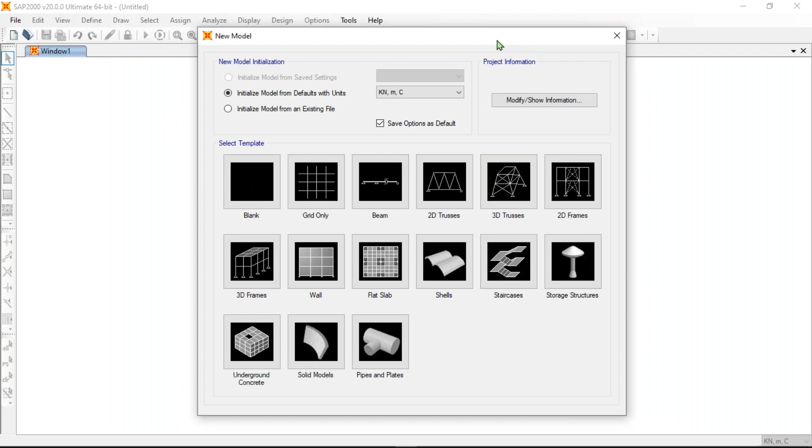Now I'm just showing you how to set up a file. Click on New Model, and then you will be displayed with a dialog box asking you to set the units of the model. Basically the units will be kilonewton and meter, and then you will be displayed with different types of templates. I'll be explaining all these templates now.

The first template is your blank template. Whenever you select this template, when you open the SAP file, the template will be blank and there won't be any grid lines. This template is used whenever you are importing any AutoCAD file or any files from other software.

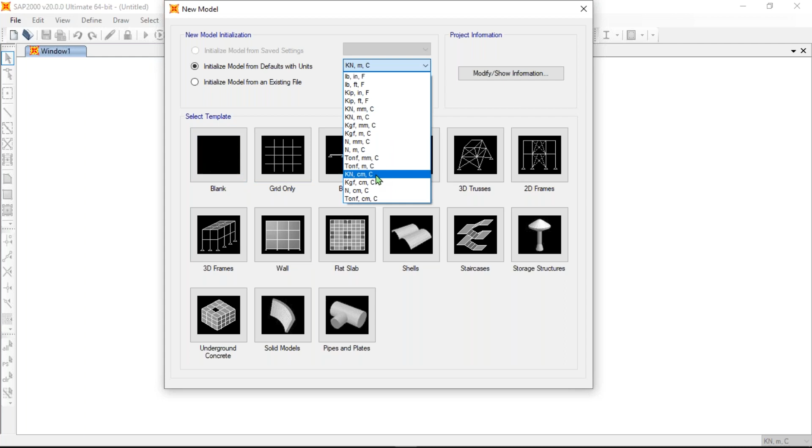First of all, this one is your units. You have to set the units, and then you have to select the template which you want to work in. The first one is the blank template. It is used to import other file formats to SAP 2000 and start working on them. It can be used to import AutoCAD centerline diagrams and start drawing from them.

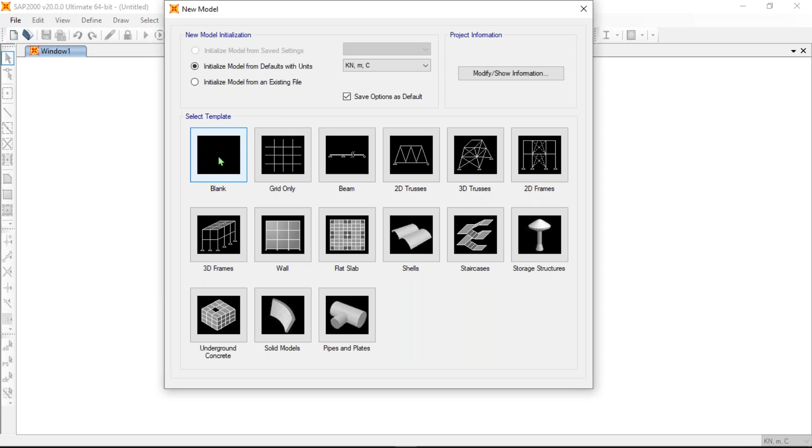The next one is the grid only template. With this template, you can set the center line diagrams, specify the distance between the grids, and start drawing from the grid. There are grids in X direction, Y direction, and stories. You can specify the length and the number of grids you require, and start your modeling from this grid only. The next one is your beam.

If you want to analyze a beam, you can use this beam template, and then you have 2D truss and 3D truss. The main difference between trusses and frames is that trusses only have axial forces, only tension and compression in the member. They won't experience any bending moments or shear. In order to draw and analyze a 2D truss, you can use this 2D truss template.

The 3D truss is used to draw high tension towers, high voltage lines, and telephone towers. You can also use it to draw industrial sheds or the function halls we see in our daily life, and different types of industrial and commercial buildings with steel structures. You can also do them in the 3D frames.

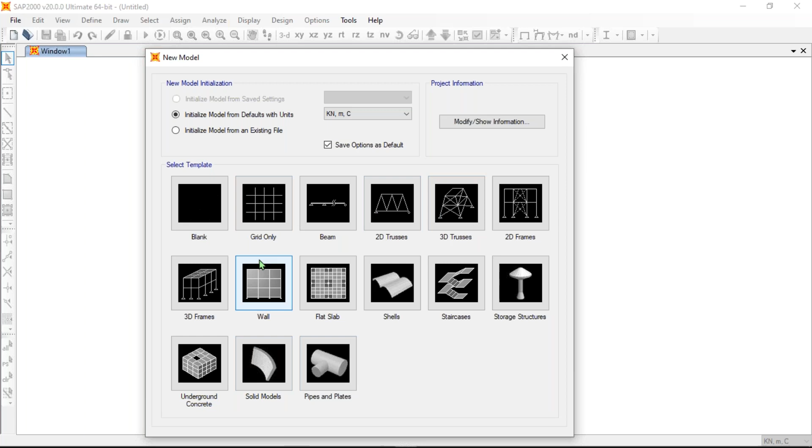Okay, these are the different templates available in SAP 2000. Unlike ETABS or any other software, SAP 2000 provides different types of templates, so a vast range of structural elements or structural models can be analyzed using these templates.

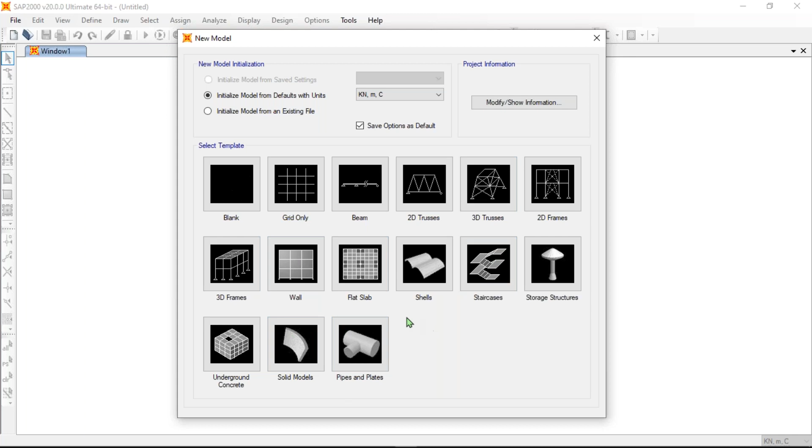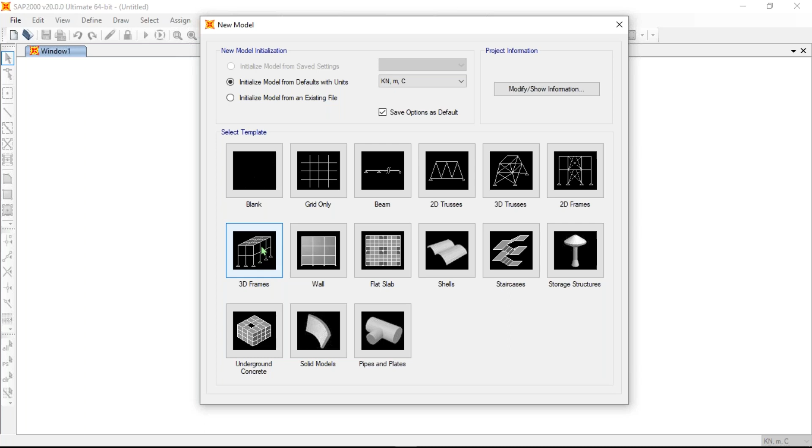In this FDP, the main objective is analyzing residential and commercial buildings. For that, we will be using only the 3D frames template. After clicking on new model and setting the units, click on this 3D frames template.

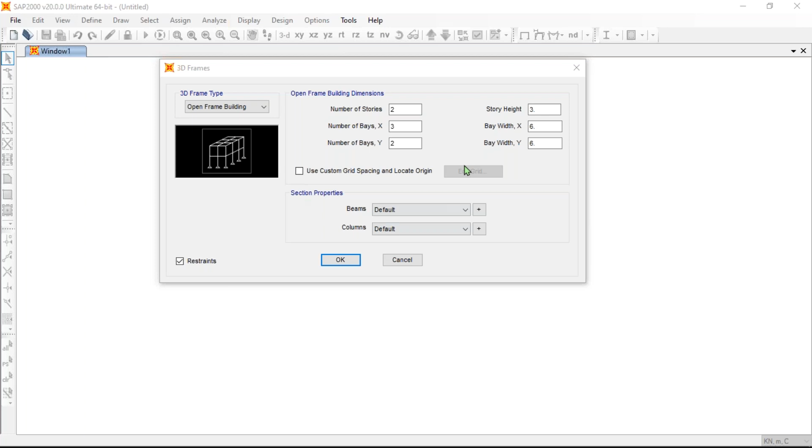Okay, in this 3D frame... yes sir. Yeah, a small clarification. This video is recording on your screen, right? It's in recording mode already? Yes sir, it is recording. Okay, then fine. Sir, do I need to save the recording at the end, or will you be doing it? No need, I'm recording. It will record automatically. That's it. Okay. Yes, sir. Okay, let's continue with our FDP session.

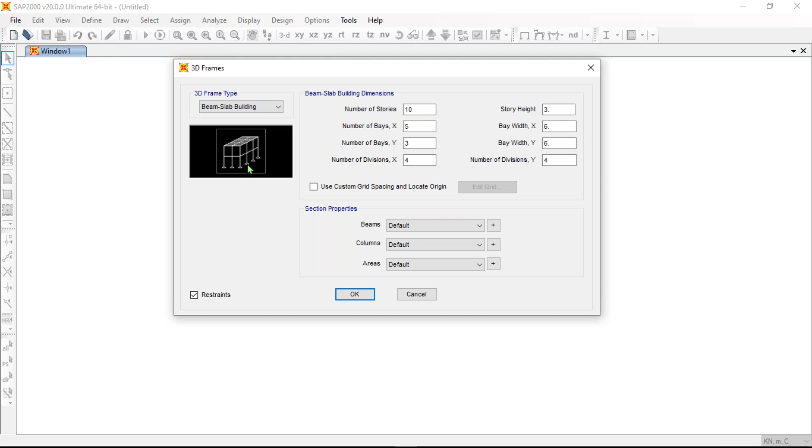In the 3D frames, you will be shown 4 options. One is open frame building, an open frame without any slabs. The next one is perimeter frame building: only the perimeter frames will be available, and the internal beams and columns disappear. Beam slab building comprises columns at the perimeter and interior, beams, and slabs. And the last one, flat plate building, only the plates and columns will be displayed.

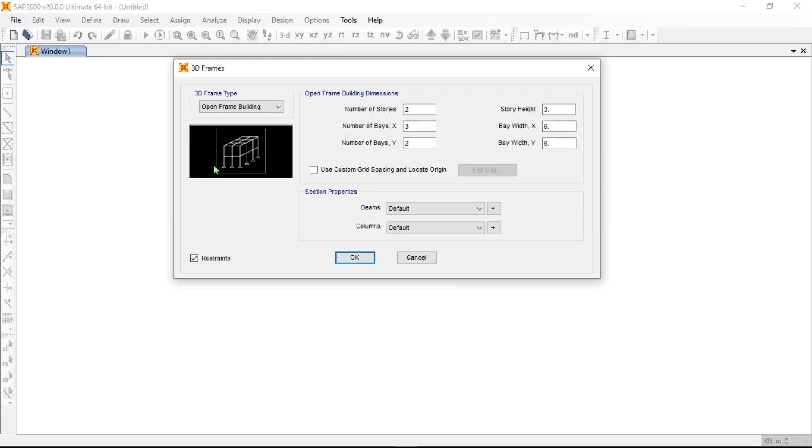To start our modeling, I'll be going with beam slab building. You can also use the open frame building; after creating the model, you can draw the slabs. Generally, I go with the beam slab building, as the slabs are created by default. These are the 4 different types of 3D frames.

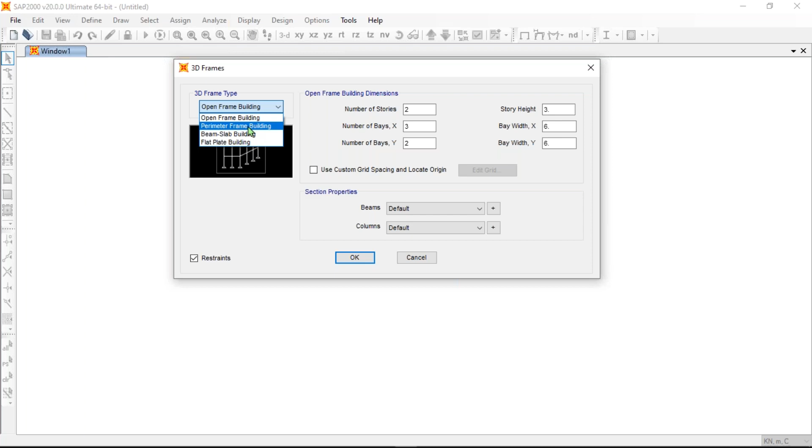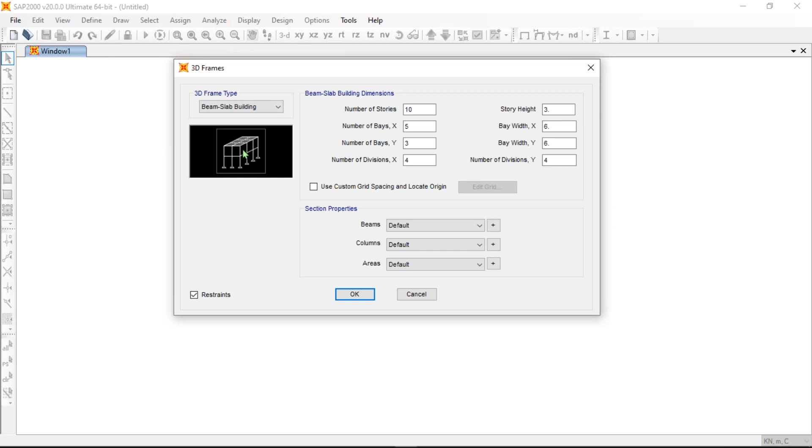The first one, open frame building, consists only of columns and beams. The next is perimeter frame building. The difference is that in the open frame building you have columns in the internal parts also, while in the perimeter frame building only columns and beams along the perimeter are created by default. In the beam slab building you also have slabs along with columns and beams. And in the flat plate building, you only have plates and columns.

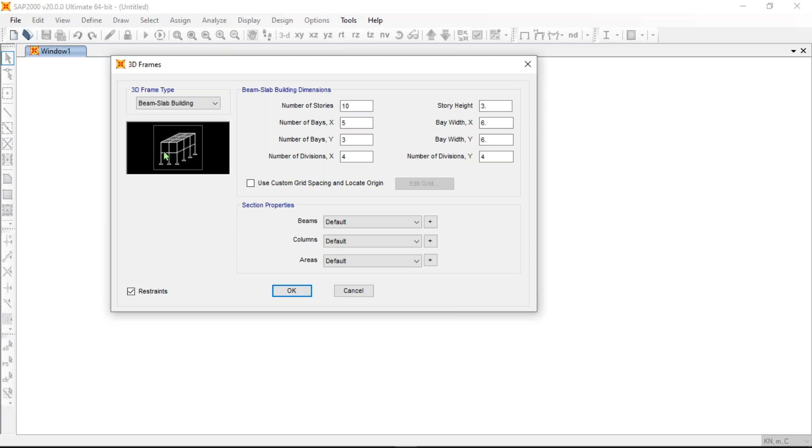Now I'm going to beam slab building. After creating this, you will be asked to give the number of stories, number of bays in X direction, number of bays in Y direction. A bay is nothing but the empty space between 2 columns. The space between 2 columns is called as bay.

If you give 5 bays, 6 columns will be created. Like if you give n number of bays, n plus 1 number of columns in that direction will be created. Now I'm just giving 3 bays in the X direction, and I'm giving 3 bays in the Y direction. Okay, and then you'll be having this bay width.

The first one is the number of stories. I'm just changing this. Story height is the vertical distance. The story height is the vertical distance, and the number of stories is how many replications of the stories you want. Now I'm just changing this to like a 5-story structure, with the number of bays in x direction 3,

and number of bays in y direction 3, and then the bay width in the x direction. Bay width is nothing but the distance between one column to the other column. So let us assume the bay width as 3.5 meters, and the bay width in the y direction, let us assume 4.5 meters.

And these divisions are nothing but how many divisions the bay is divided into. These are the divisions. Just put this to default. All these values are used whenever you are doing any geometrically symmetrical structure. When you enter these values, the grid or the center line will be created in a geometrically symmetrical way, which is uniform in each direction, with uniform spacings.

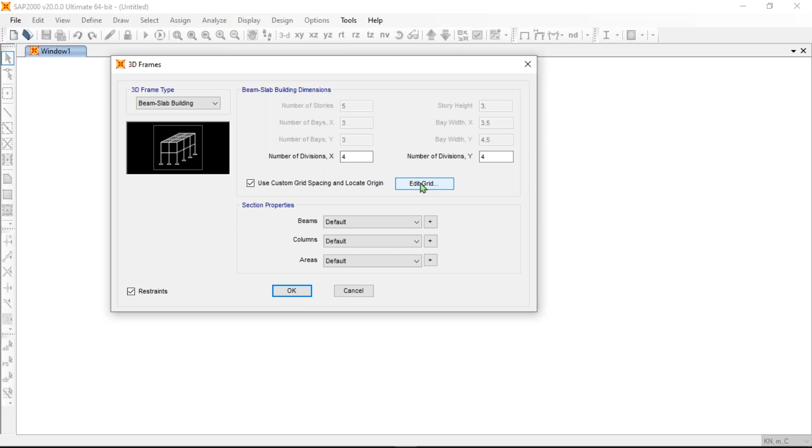If you want to create a frame with uneven spacing, you have to use this option called use custom grid spacing and locate origin. You have to tick this option, and these will be turned off, and you will be having the edit grid option. I'll be explaining the slabs when we start modeling.

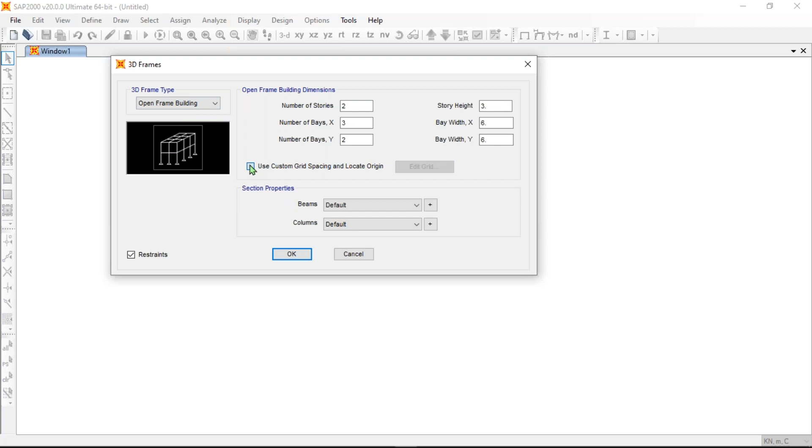I'm just moving this to open frame building. These are the same options. Just click on this edit grid, and you will be displayed with the define grid system data dialog box. In this, you will be having the different ordinates. This is the center line diagram. If you are familiar with center line diagrams and plotting, you will understand this one. I'll be explaining this once again.

The first one is x grid line data. In the x grid line, there are 4 grid lines: first grid line, second, third, and the fourth one. The axis will be somewhere in the center, and these are represented with the help of the ordinates from the axis. Like in the x, it is -9.

The A grid line is at -9 meters distance, the B grid line is at -3 units, the C grid line is at +3 units from the axis, and the D grid line is at the distance of 9 units from the axis. These grid lines are placed with reference to the ordinates.

Now, if you want to just give the spacing between 2 columns or 2 grid lines, you can change this from ordinates to spacing. Previously it was ordinates, and now it is spacing. In the ordinates, the value of the x ordinate is given over here. Now, if you change to spacing, the spacing between A and B is 6 meters.

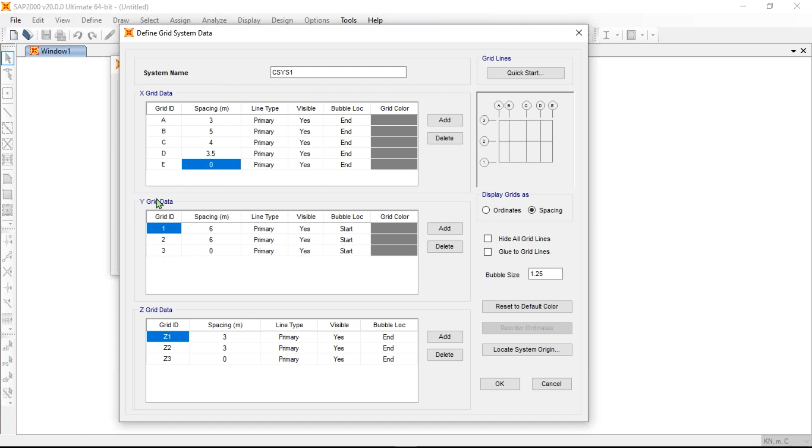And the next one, the same process in the Y direction. Now I'm just adding one more grid line in the Y direction, and for each one I need a uniform spacing of 4 meters. So I'm changing this to 4, and again I'm changing this to 4. Okay, so these are the uniform spacings in the Y direction. The last one is left to 0, as there is no grid line after 4.

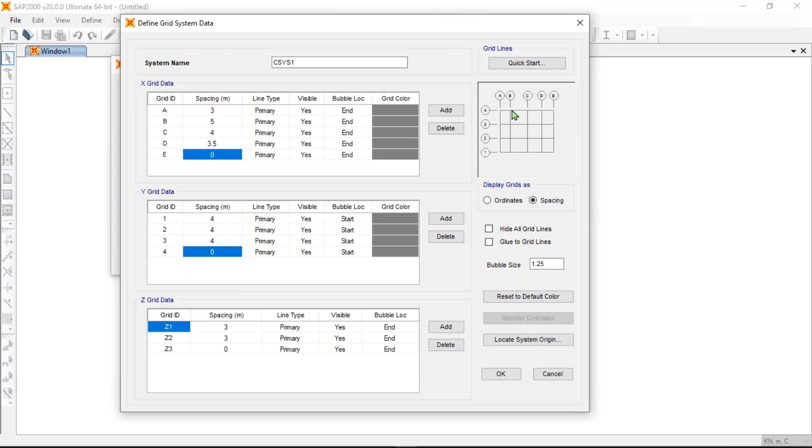And the next one, at the bottom, you will be displayed with the Z grid data. This is nothing but your story data. This one is in the X and Y direction, and this one is the story data. If you want to add another story, click on the add option and give it a name as Z4, or anything which you prefer. Just change the previous one to the story height.

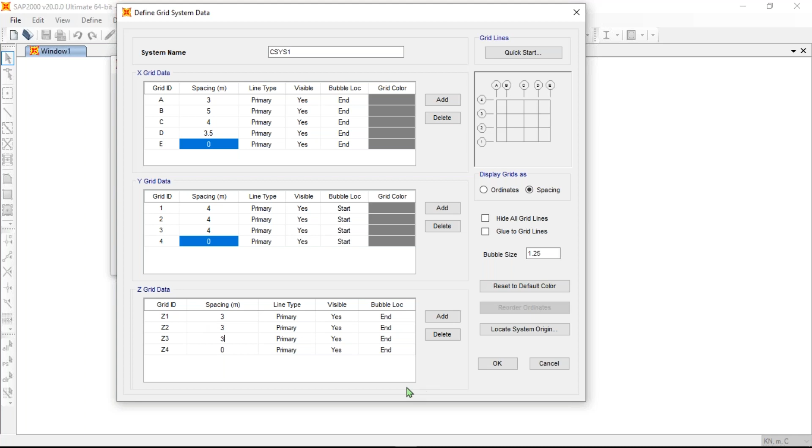Okay, first what you have to do is in this 3D frames template, select the open frame building, use custom grid spacing data, and then click on the edit. You will be displayed with define grid system data. In this grid system data, you can provide n number of grids just by clicking on this add. These grids are nothing but the lines where you place the columns, or whenever you're modeling, you will be modeling on the basis of the intersecting points of these grids.

This one is the A grid. These are the X direction grids. This one is the spacing of the grids. In order to create a new one, click on the add and give the spacing, and the last one should be left to 0.

That is when you provide this as spacing. If you click on the ordinate, you have to provide the ordinates with respect to the origin. The origin will be somewhere over here in the middle of the model. You have to create them with respect to the origin in the X direction and in the Y direction. I prefer to use spacing as it is more convenient.

I prefer to use this spacing. So you have to give the spacing between the grids. You have to give the bay spacing. And the next one, in the Y direction, you repeat the same. I am giving this as uniform spacing.

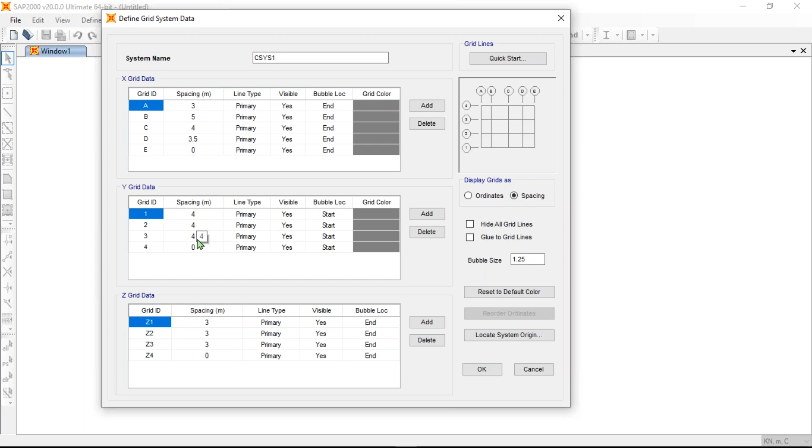And the next one is our Z grid data. Z grid data is nothing but your story heights. I have given 4 stories, each of which will be 3 meters in height. And after that, just click on OK, and the grid data will be saved.

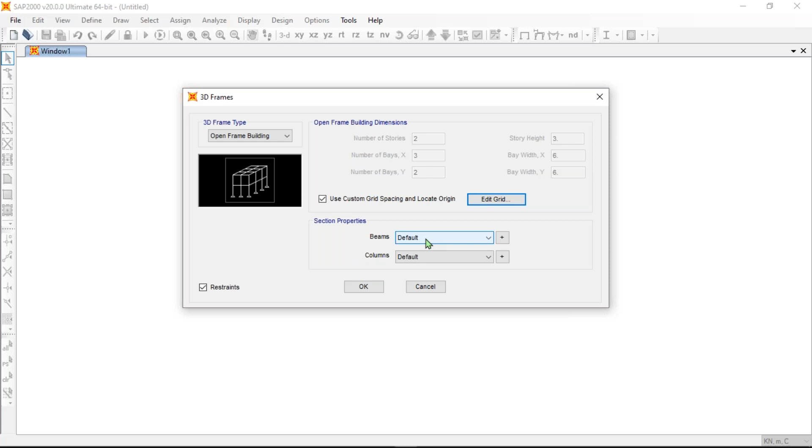And in this, you can provide default beams. By default, there will be some beams. You can provide them over here, or you can also model them after opening your model. Now we are just setting up the template, guys. Remember, we are just setting up the template. In the edit grid data, edit everything. Give the grid data and the story data and click OK.

And after that, you can give the section properties over here, or you can also do them after opening the project. Now I'm just opening the project, and this one is a restraint option. Restraints are nothing but the support conditions. Whenever you model a structure, there should be support conditions.

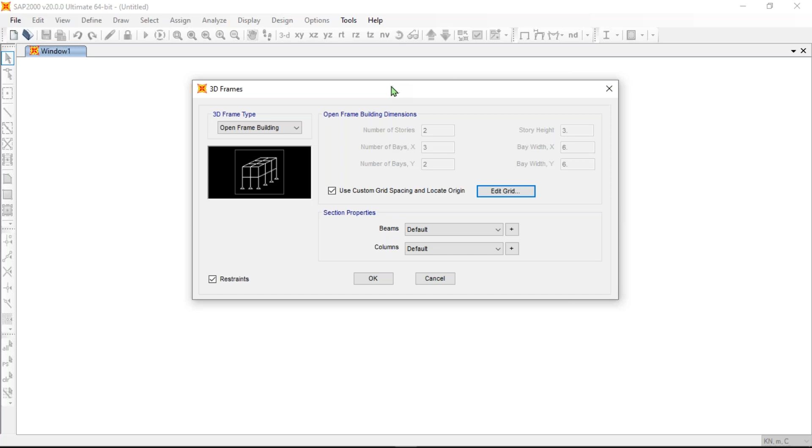Universally, all the support conditions for an existing building are fixed supports, like the foundations are fixed supports, except whenever we are using base isolators for research purposes, or at some buildings we will be providing base isolators. Not much in India. For that, the restraints will be changed. For all the other buildings, all the foundations are fixed supports. These support conditions are called restraints in SAP 2000 or any of the modeling software.

Just click on OK, and the model will be generated with the values which you have given previously. And this is the start screen of your SAP 2000. I'll be explaining the user interface now.

The top one is the title bar, and after that this is your main menu. These are the tool menu. These are all the different shortcuts which are placed across your working space. You can rearrange these shortcuts just by placing the mouse over here and dragging them. These are the different tools which we use for modeling and analysis purposes.

Now let us go through each of the menu options. The first one is the file. As you know, in the file you'll have options for creating a new model, opening an existing model, save as, importing and exporting from other software, or accessing the files which you have recently opened. This one is the file option.

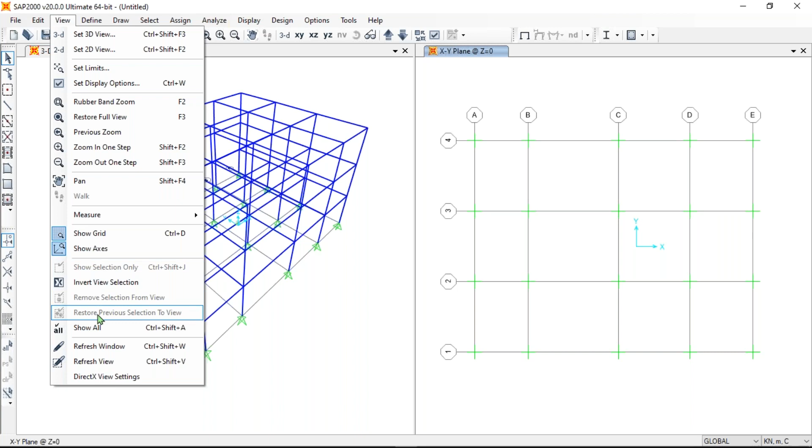And then you will have the define menu. From here, our structural part, the modeling part, or the academics which we have learned will be useful. The first one is the material. As we have discussed previously, from strength of materials we get all the properties of a material, such as its Young's modulus, its density, and other material properties. You can set up the material properties over here. We'll be explaining this in the next classes also. I'm just briefing you now.

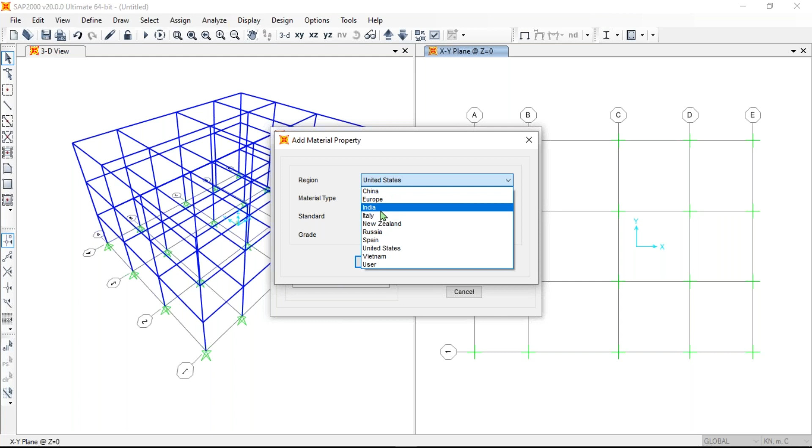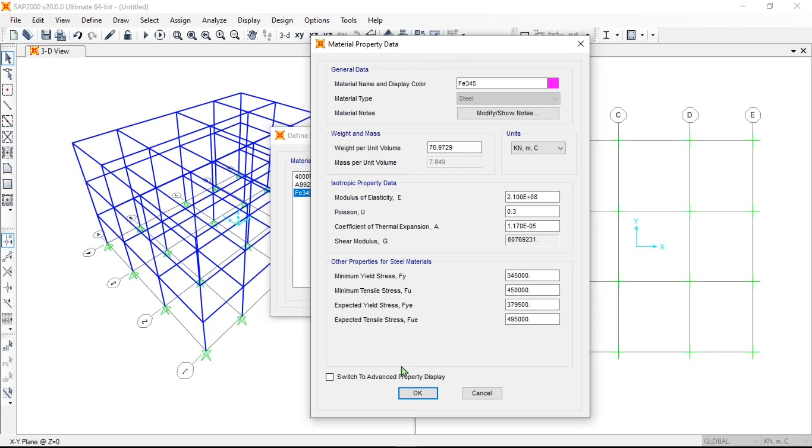See, these are the different material properties, such as density, weight per unit volume, modulus of elasticity, Poisson's ratio, coefficient of thermal expansion. You can also do thermal analysis using this SAP 2000. You can also check the temperature stresses and everything in this SAP 2000. And if you switch to advanced properties, it will be showing some properties such as isotropic, uniaxial.

Like this one is the loading options. You will be having a few other options like nonlinear material data, material damping properties, and thermal properties. This nonlinear material data and material damping properties are very important when you are doing nonlinear analysis, such as time history analysis and pushover analysis. These are static nonlinear and dynamic nonlinear analysis.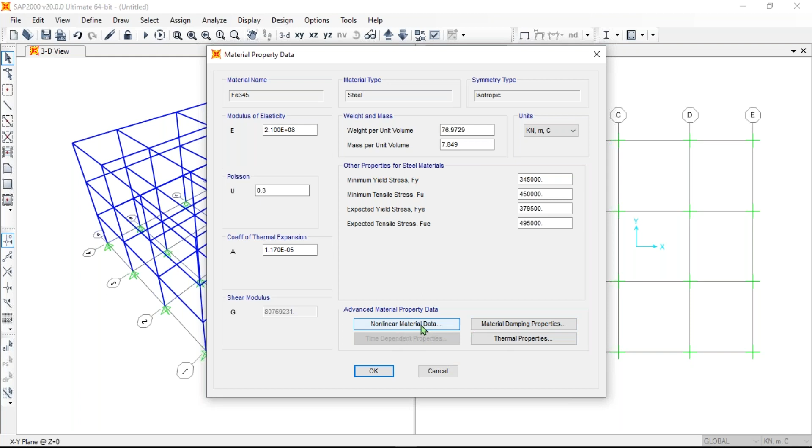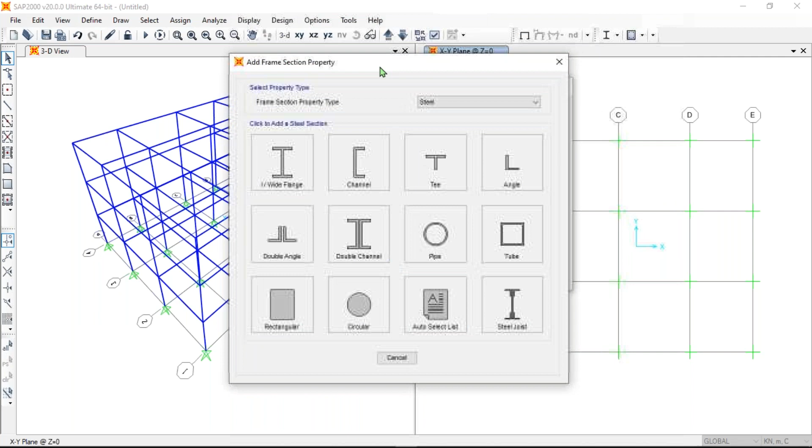In order to incorporate the nonlinear properties to your structure, you will be using this nonlinear material data and material damping properties. You will be changing these parameters to incorporate those properties into your structure. This one is the material properties, and then you will be having section properties in order to define the different size and shape of a section, like a circular column or a rectangular column, or steel sections like I section, channel section, T sections. Any type of section, you can set up the dimensions over here.

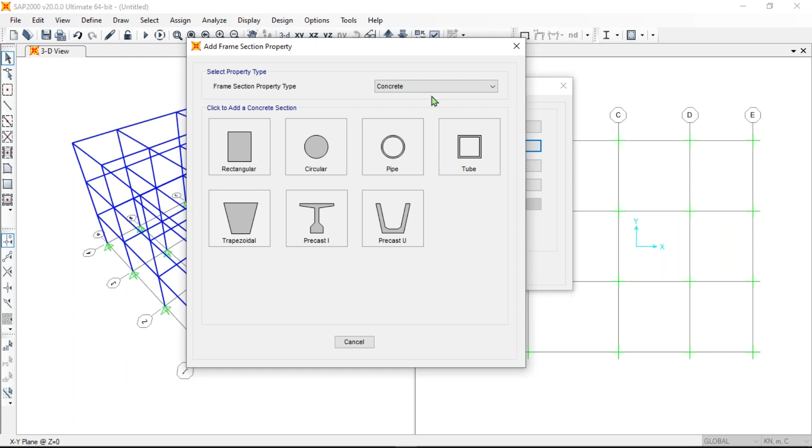And also there is an option called section designer. These are all the basic general sections which we generally create while modeling. There is another option called section designer. This section designer is used to create an existing designed section, with all the reinforcement and all those things. We can use this section designer to create such types of sections. This one is very useful for your M.Tech thesis or research purposes. This section designer is very useful.

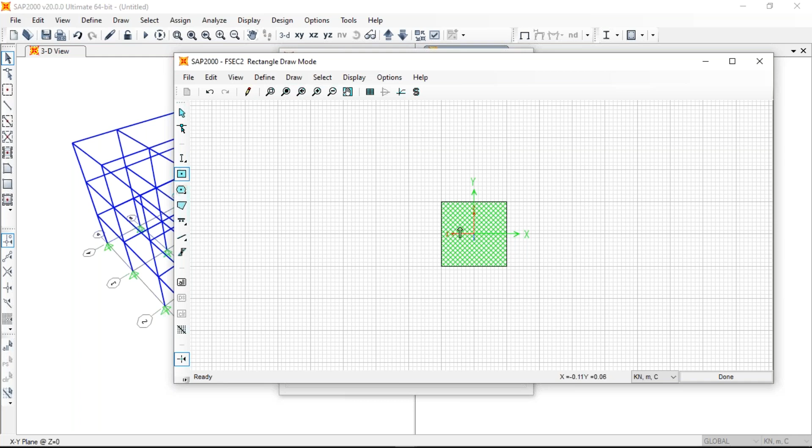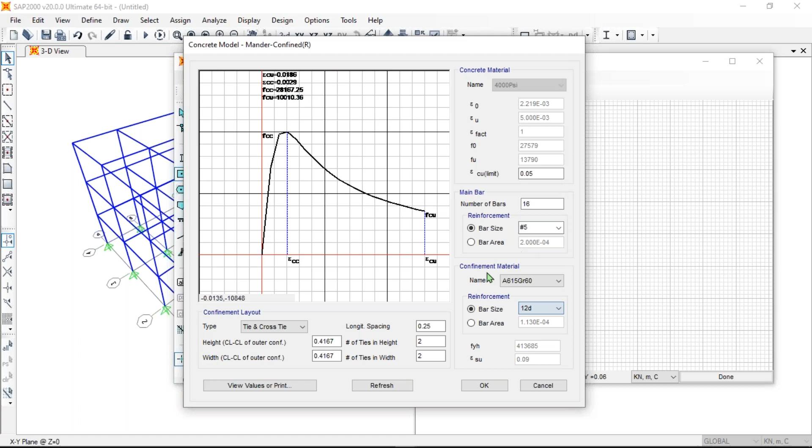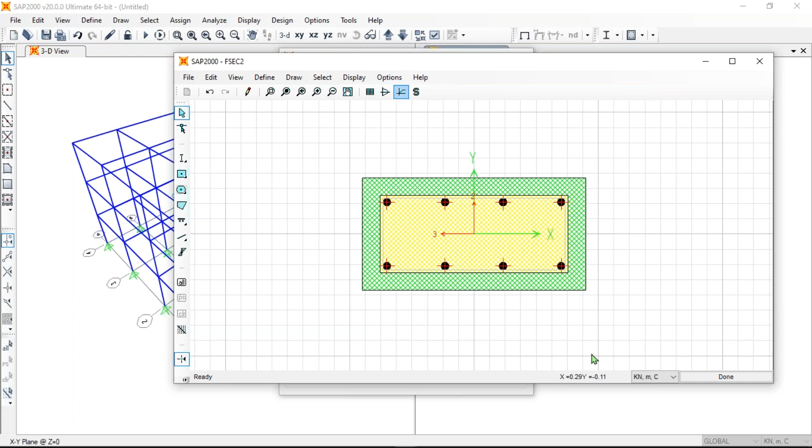This is the stress strain curve of your model. You have to set the bar sizes. You have to enter a few parameters over here, and then you have to provide the reinforcement to the structure and click OK. So in this way, you can create an existing structure. Whenever you take an existing building that has already been designed, you have to take the dimensions and the diameters of reinforcement provided inside the beam or column from the structural drawings, and through that you can create a similar element in SAP 2000, and you can check the moment curvature.

This moment curvature is very important. One minute, guys.

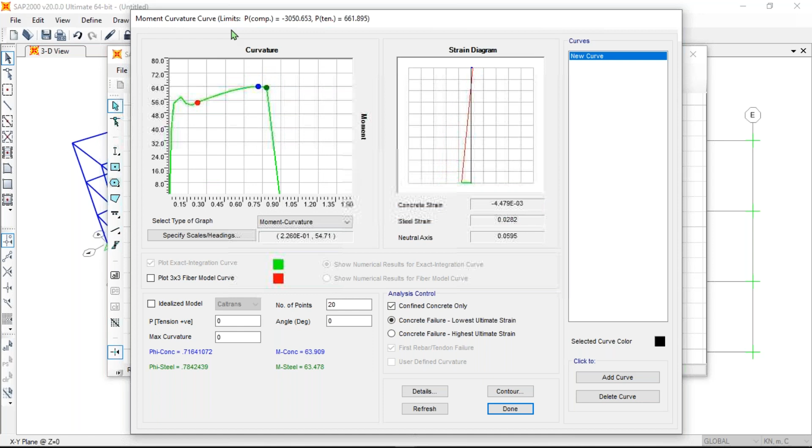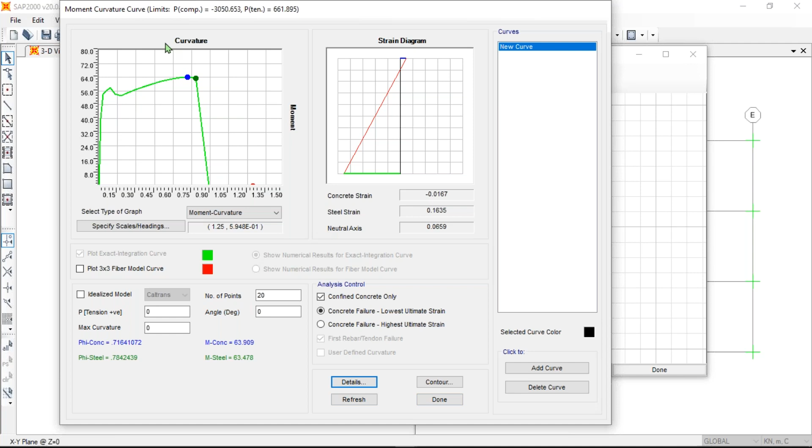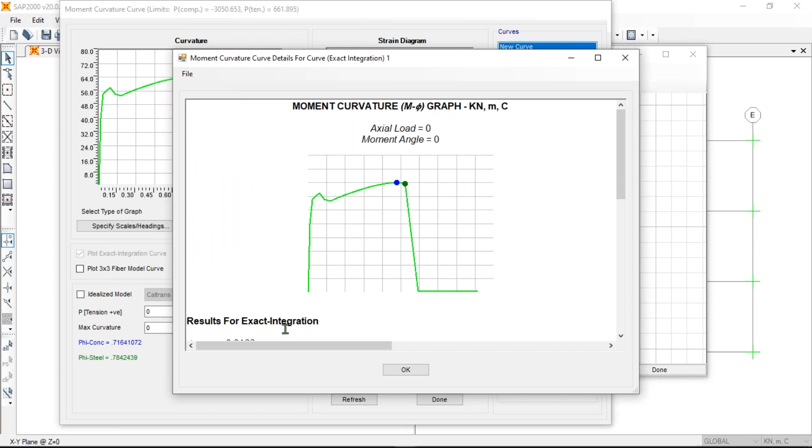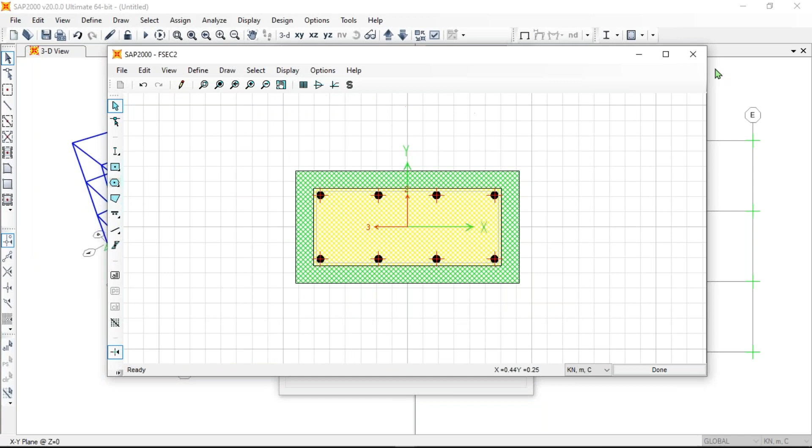Based on this moment curvature plot, you will be getting the yield moment and the maximum moment which the section can retain. All these curvature and moment values you have to note down whenever you are doing this nonlinear type of analysis using this section designer. You have to set all this up whenever you're doing pushover analysis or time history analysis. This section designer is very useful.

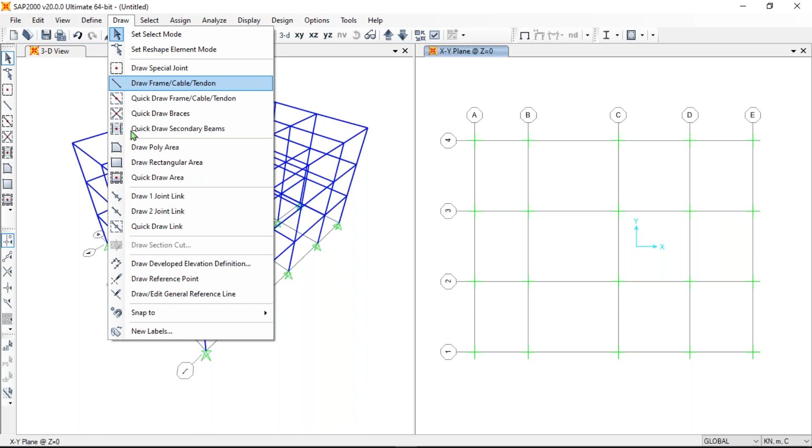And the next one, in this menu, you will be having options for function in order to create a time history function, in order to create load cases or load patterns, or in order to create load combinations. You will be having all the options in this define. And the next one is the draw command. First we have set up our model, like we have created the grid lines and story heights, and then we have created the materials and sections, and then we will be starting to draw the structure, and after that assigning the loads.

In this assign, we'll be having the different options to assign the loads, and in this select, we'll be having different options to select different materials or different elements in the model which we have created. Like if you want to select only the beams, you can select based on the properties, like selecting the parallel lines.

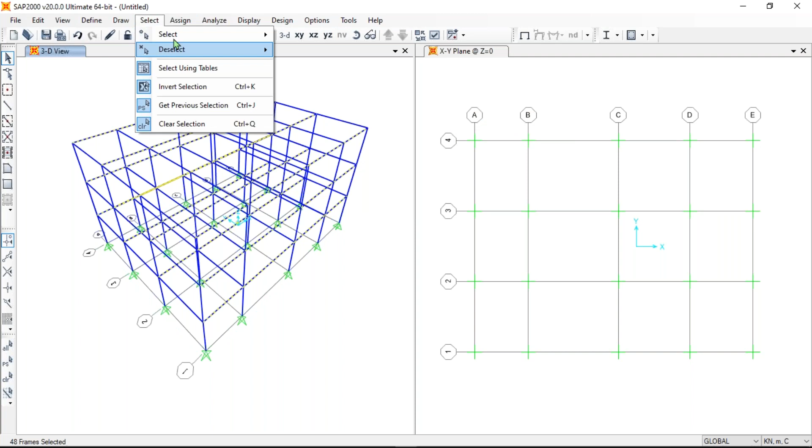All the parallel lines have been selected, or else you can also select from the properties. Like I have created one property. If you want to select the elements with that property, you can select that option. Now F1. Okay, all these elements are of FSEC1, so all the properties have been selected. This is one of the methods of selection, and you'll also have different types of selection methods.

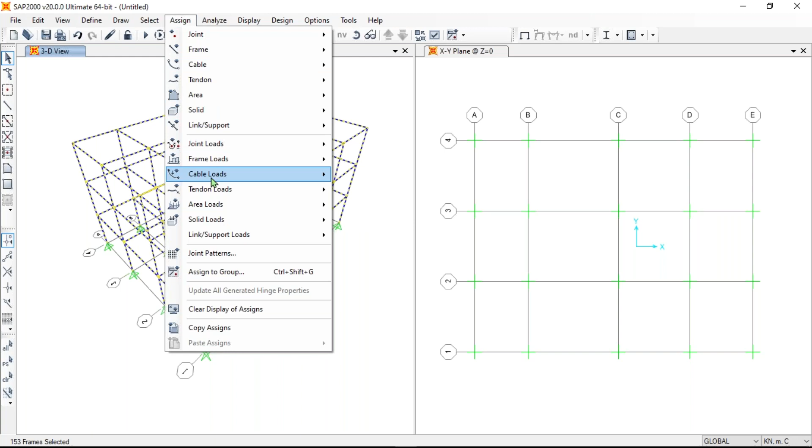In the assign menu, you will have the joint loadings and different types of assignments, such as assigning the restraints, the fixed supports; you can go for joints, frame assignment, and hinges assignment. Different types of assignments are in assign, like loadings and frame assignments. Next one is analyze. In analyze, you will be analyzing the structure, running the model for different load cases and different types of analysis.

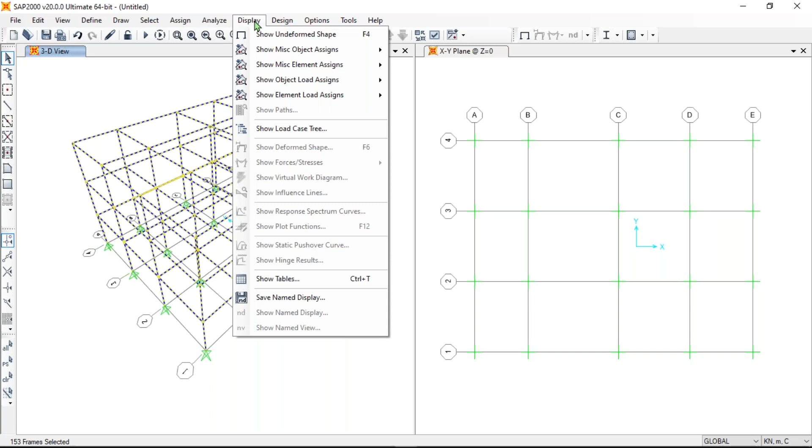In the display menu, after the analysis, all the outputs will be displayed. And after analysis, we will go for the concrete design or the frame design. This will be in the design menu. And these options are nothing but the extension for your software. If you want to change any of the interface, any of the settings, or any of the colors of your materials, you can use these options.

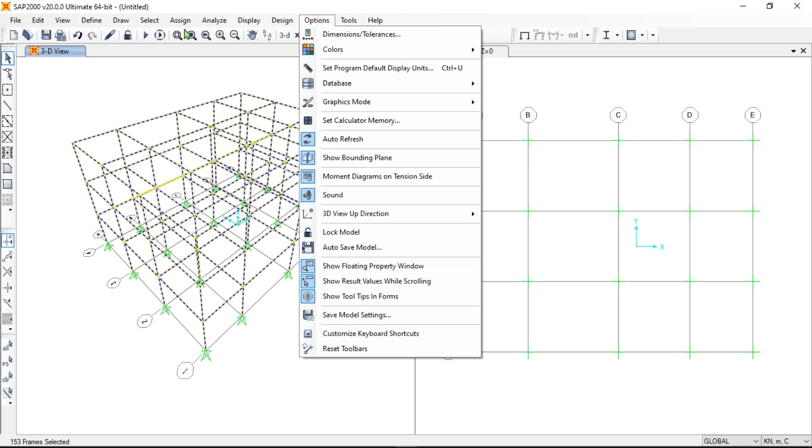Help is used for accessing the manual of SAP 2000. You can access the manual, you can access the web for help. In tools, you can provide different types of plugins to your software. This is completely about your main menu. And then these are the different shortcuts inside the main menu; whatever icons are represented here are the icons just below your main menu.

And then this one is your working screen. This is the active window, where the blue one is highlighted. This one is the active window, and this one is the inactive window. Whenever you are drawing in the active window, it will be highlighted with the blue color. And whenever you make any changes in the active window, if the view is 3D, it will be immediately displayed in the 3D view.

Okay guys, next, you can add more windows. Now if I close this window, this one becomes the active window. And if I want to add one more window, just click on this drop down option and click on add new window. Okay, you can change the views from these four options. The first one is a 3D view, which is represented now. And the next one is your XY plane.

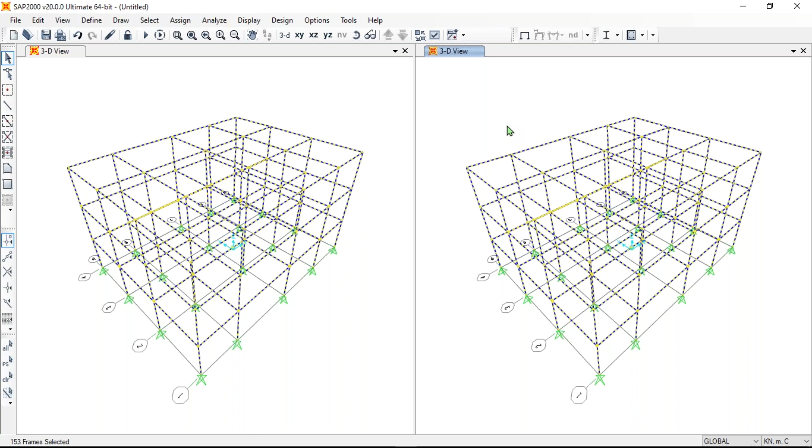When you see the axis over here, you will be represented with the XY plane. If you click the XY plane, the view will be changed to XY plane. And you can change the story which you are working in. Now it is in the 9. Whenever you are selecting the 9, it is at the top level.

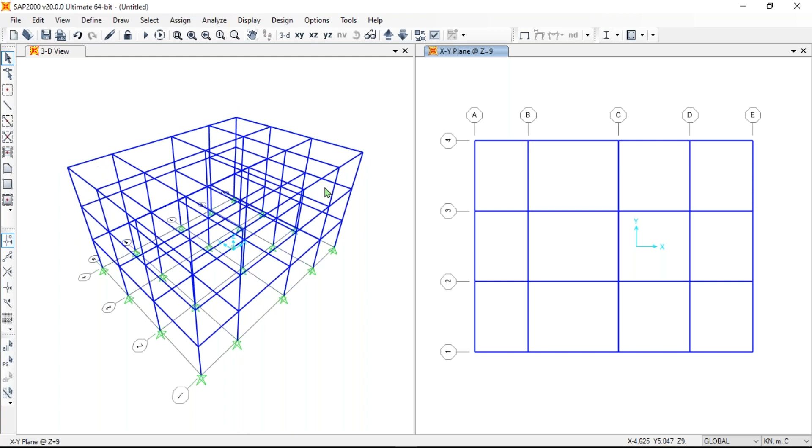Whenever you are highlighting something over here, a blue plane will be represented in the inactive window. Just observe it over here. If you see on the left side, there is a blue plane represented. Now if you click this move down in list, it will be moving to the second one. Now the XY plane is at the level of Z6, Z is equal to 6 meters.

Now it is moved to the second level. Now again it is moved to the first level, and now it will be moving to the base level. And again we can go to XZ. In the XZ view, this one is the XZ plane. Similarly, if you click on these arrows, you can move to different frames. In the XY plane and XZ plane, you can move into the different frames.

And similarly in the YZ plane, using these arrows, now the outermost perimeter frame is displayed. If you see, there will be a plane highlighted over there, and by clicking these options, you can move this to any other frames.

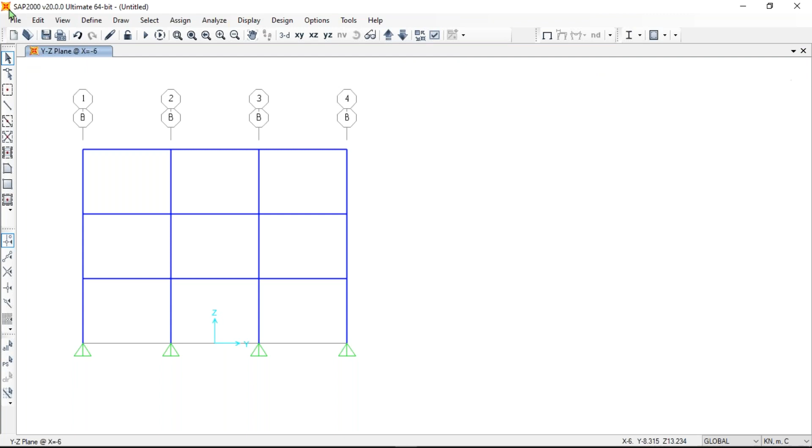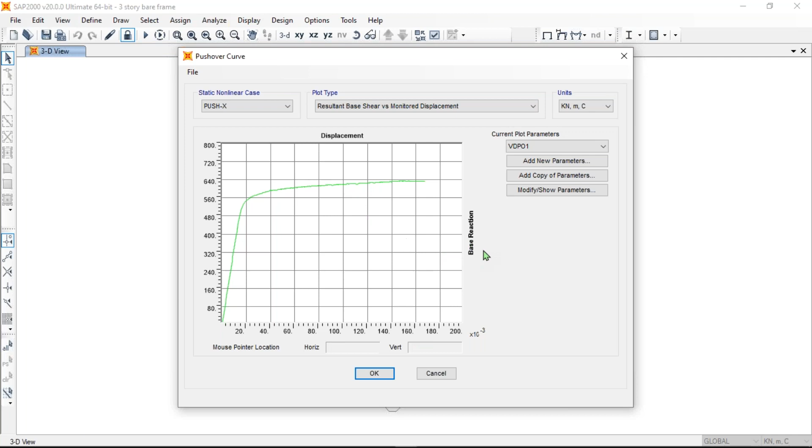Okay, this is a project on which I have performed the static nonlinear analysis, which is called pushover analysis. So when you click on this display, you'll be having all the outputs. In this, if you click on this static pushover curve, you will be displayed with the roof displacement by the base reaction. This is the static pushover curve after the pushover analysis, static nonlinear analysis. And in the display, if you click on this, show deformed shapes.

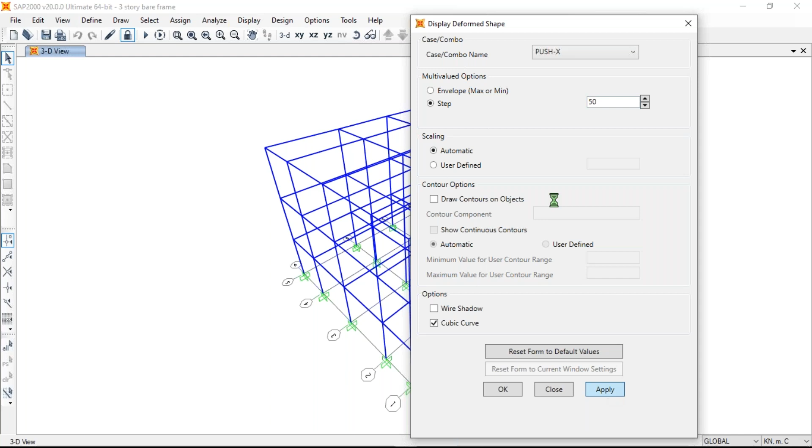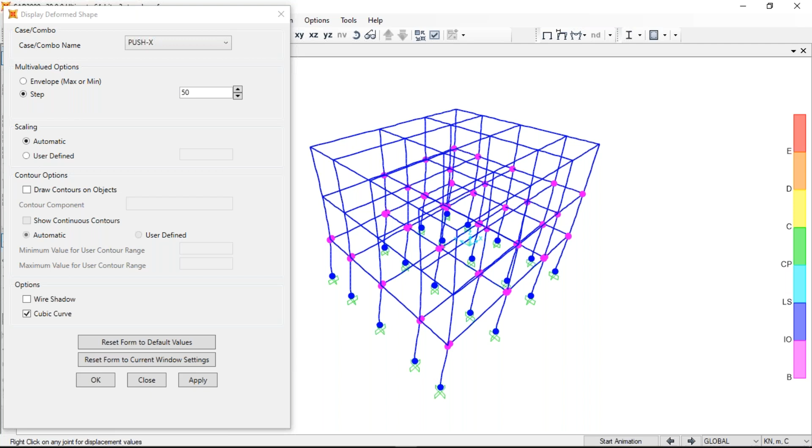These are the different hinge formations for your model. Whenever you do this static nonlinear analysis, after the analysis, the hinges, which are nothing but the yield points, are displayed with different colors. Each color represents a different damage state. The different damage states are immediate occupancy, life safety, collapse prevention, and collapse. I'll be explaining them in the coming classes, whenever we are dealing with these pushover curves. These are the different hinge formations.

And there is an option called animation, start animation. It will show the movement of the building whenever you are doing this pushover analysis or any type of analysis. It will display, with the animation, how the building is reacting to the load which you have applied.

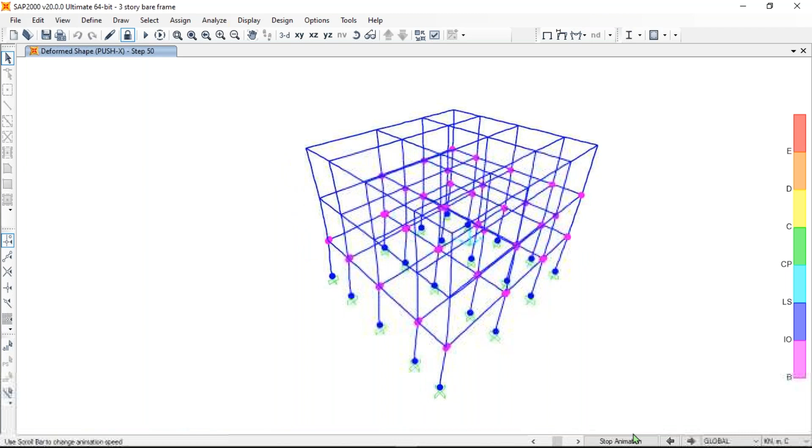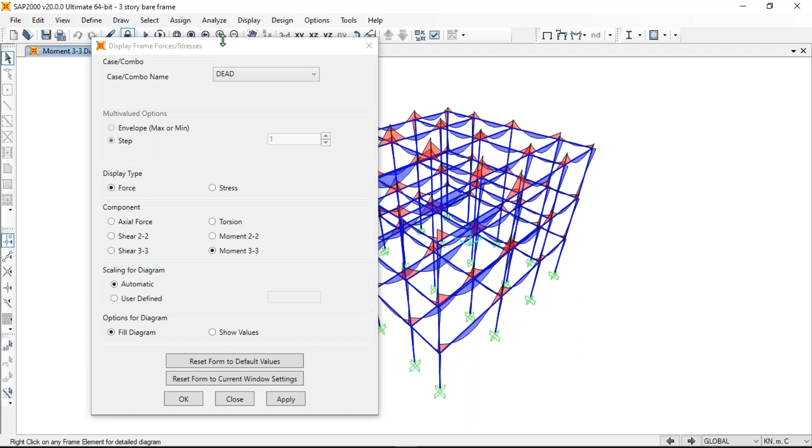And in this, when you see over here, guys, there are a few icons, the same icons, like show forces. This will be displayed in the shortcuts. In this, if you click on this option, the bending moment in the major direction, 3 direction, and the axial forces, all this will be displayed for the load case which you have selected over here. This one is for the dead case. If you want it for any other load case, like this dead combination, it will be changed.

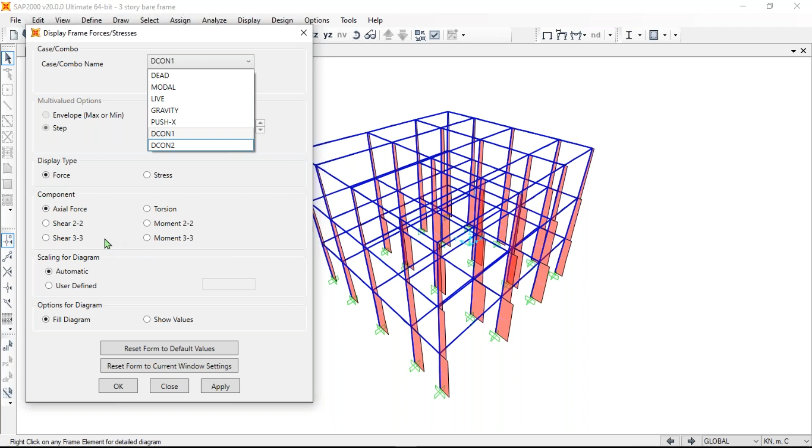You can select any of the load cases, and you can see what are the bending moments and what are the shear forces which are represented. If you click on this show values, it will display the values. We'll be dealing with this in the coming classes. This is just for your reference. This is one of the models. And now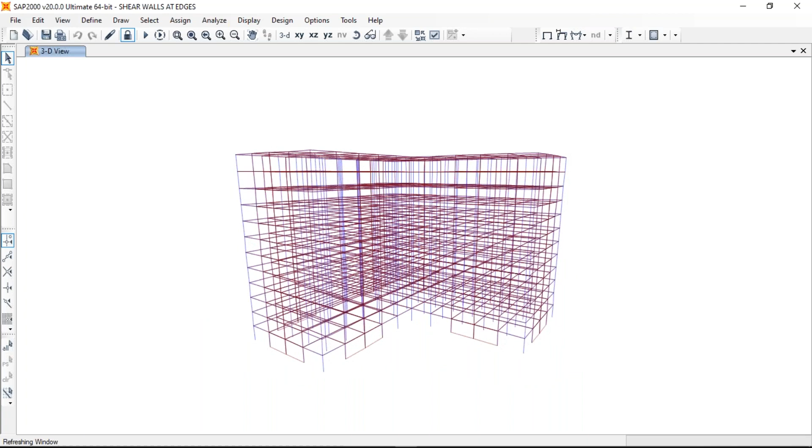this one is the shear walls project. Whenever you provide the shear walls, it will be something like this. And in this, I have done the time history analysis to display the plot functions. In this, we will be displaying the plot functions. This one is the time history function.

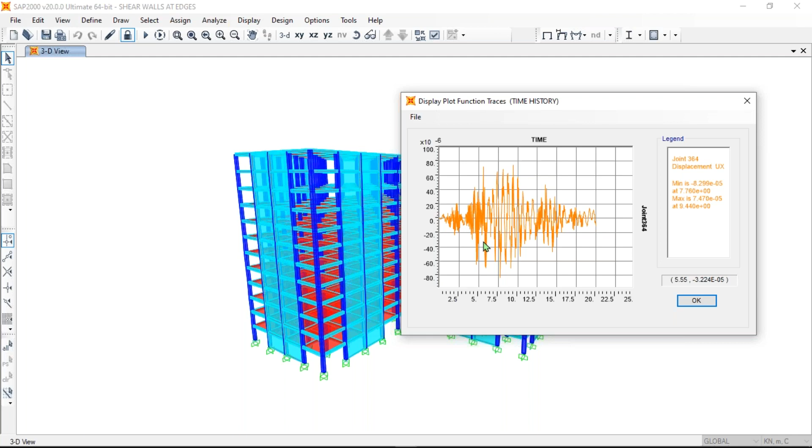Whenever you are giving a ground motion, the structure will be moved, and the top displacement or the joint displacement will be noted according to the earthquake ground motion acceleration file. This will be formed. From this you will be getting the maximum displacement at each time period, at each time second.

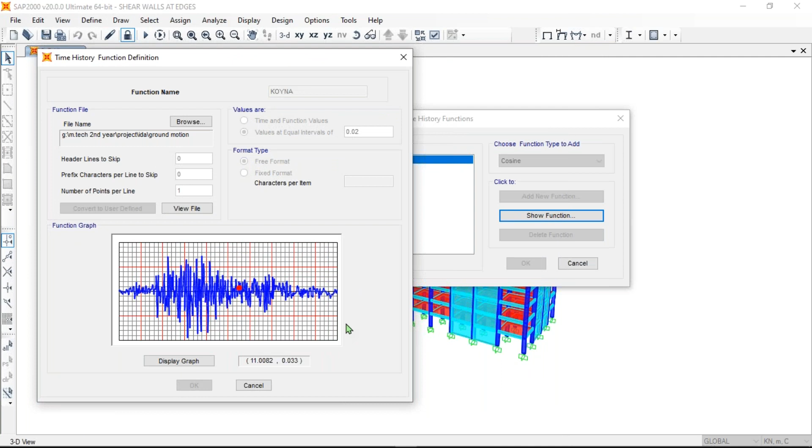The Koyna earthquake function I have used for this building. This one is the ground motion file. When you apply this ground motion file, the model will be subjected to ground acceleration or ground movement, and it will generate this type of outputs. For the ground motion which you have given, this is the output which the model generates.

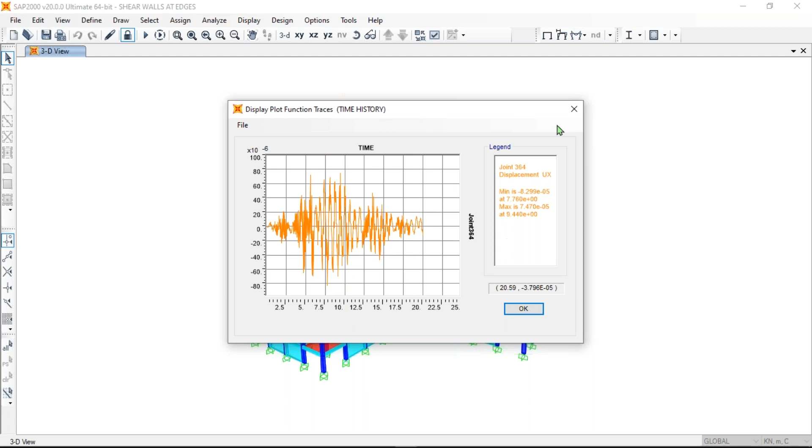Okay, these are the different types of analysis which you can perform, like pushover analysis and time history analysis, using SAP-2000. Okay guys, so that's it for this session.

In the next session, my colleague K. Tejaswini will be taking the session. She will be dealing from the start, like how to model a structure, how to set up a structure, and all those things will be dealt with by her.

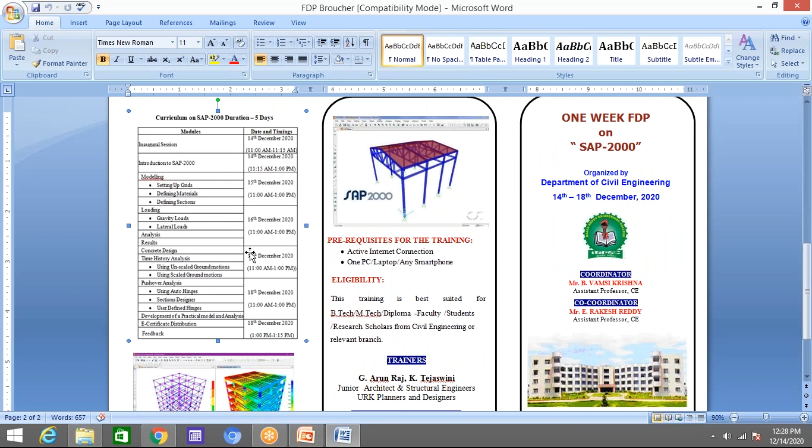When you compare these two softwares, the outputs are the same, but the method of how you use these softwares differs; the interface of STAAD.Pro is very old. SAP 2000 provides more interface and more types of analysis. In the basic version of SAP 2000, you can do pushover analysis, time history analysis, and everything. But in STAAD.Pro's basic version, you cannot do pushover and time history kinds of analysis. The higher analysis you cannot do in it.

Yeah. Okay. Thank you, sir.

Both softwares are different. It's all different actually. But the output is the same. The type of things we do internally in the software are different.

Good afternoon, sir. Arun, there is a question. Can SAP be used for design of foundation? No, Milind Gupta. SAP cannot be used for design of foundation. There are a few other softwares provided by CSI, Computers and Structures, Inc..

They provide a few other softwares such as RFM and STAAD Foundation. You can use STAAD Foundation. You can use RFM for foundation designs. You can use a few other softwares for design of foundation. You cannot do the foundation design in SAP 2000.

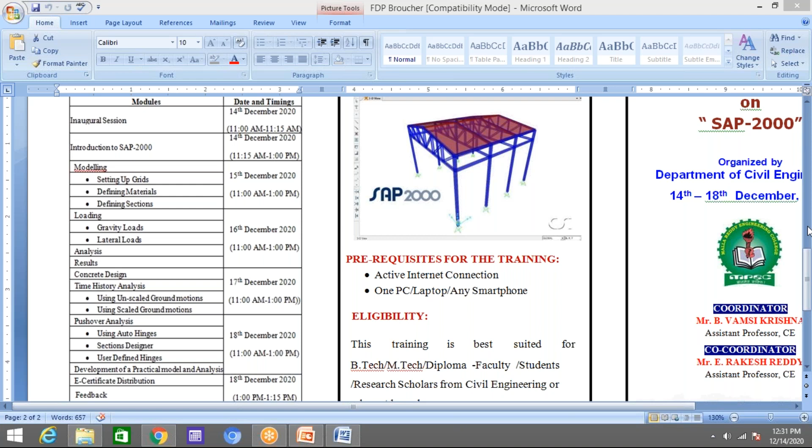Apurva Yogya: can you please explain the difference between finite element analysis and the structural dynamic method? Actually, finite element analysis is a method, but structural dynamics is not a method. It is a subject. It is a concept, in structural engineering. Finite element analysis is a type of method, just like Kani's method or the moment distribution method.

Finite element analysis is a method of solving the problem, solving the forces, resultants, stresses, or bending moments. Whereas structural dynamics is a complete subject. So these two are completely different. Finite element analysis is different and structural dynamics is different.

We use the finite element analysis method and the concepts of structural dynamics in order to solve the problem. So these two are different. The first one is a method and the second one is a concept.